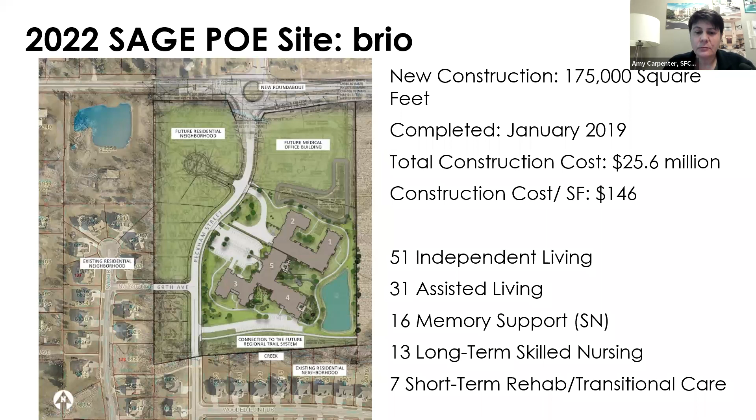So the layout of the building: we have assisted living and independent living on one side, with commons in the middle. The blue on the left is independent living, and the purple represents assisted living, and you can see how they're right up next to each other. On the right side of the plan are the skilled nursing households, which are one-story household buildings with separate entrances from the outside. The assisted living and independent living building is a 3-story building over a limited underground parking garage and service area.

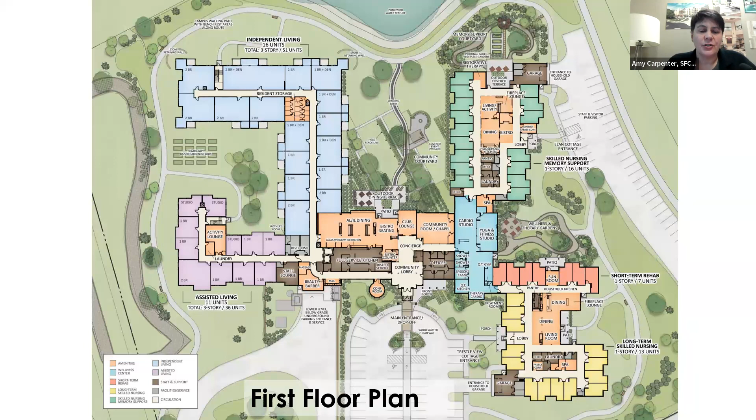Because this was a middle market targeted project, the owner and design team intentionally reduced the amount of common space and made it as flexible as possible to serve multiple functions. The bistro seating can be used for additional dining. The lobby space is used often for activities, as well as the additional bistro seating. The club lounge has large barn doors on 2 sides of the room that can open it up to other spaces, again to allow for flexible gatherings.

The one thing we heard from the residents is that they wished the community room was larger to accommodate more people. We were wondering if possibly this could have been achieved by just opening up the wall between the club lounge and the community room with another set of barn doors or some kind of movable partition. Something to be thought of next time.

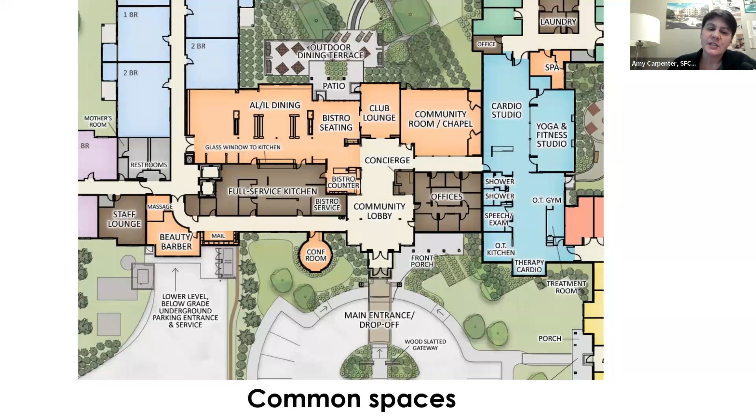The memory care household, and this is a skilled nursing level memory care, has 16 units, and the common space was really nicely divided up for sound and to create different experiences for the residents.

There is a direct access from the outside in the parking lot that comes into the household, and you can see the red arrow at the bottom of the page there. Then the garage in brown on the right-hand side was intended to be used for transfers, people being brought in, new residents, or people being transferred in and out of the hospital.

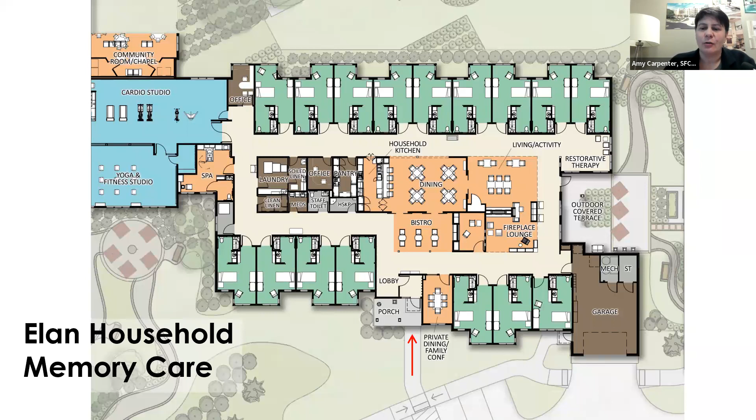One of the interesting things we heard was that the plan originally was to store garbage in the garage, but the smell got a little bit too much. So they added dumpsters outside the garage with screened enclosures.

The second household also is skilled nursing level, and this is long-term care and short-term rehab. The peach or pinky color rooms on the right-hand side of the page are designated for short-term rehab—there are 7 units there. And then the yellow rooms were 13 rooms of long-term care.

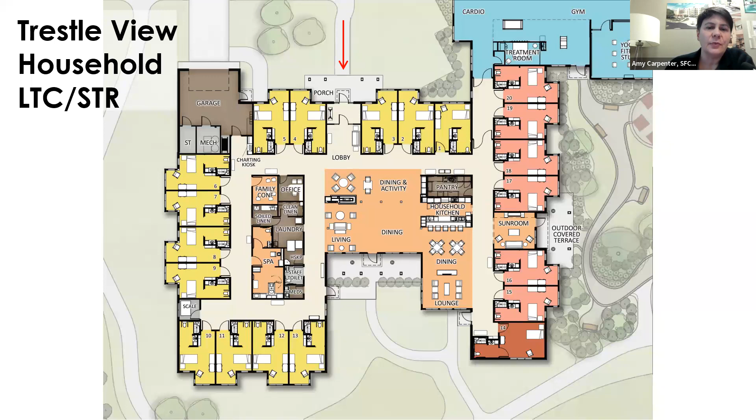The common space here is a little bit more open. It still has the distinct door to the outside, as you can see with the red arrow. And the one thing I do want to point out, if you can see on the right-hand side of the page above the peach rooms, is that there's a direct connection to the physical therapy space, which you see in the teal color. This was an intentional lining up of the short-term rehab rooms right next to the rehab space, and we'll talk a little bit more about that later.

So here's the typical floor plans for the assisted living and the independent living. Again, the assisted living is in purple and the independent living is in blue. They really wanted to put the rooms together in a way that there was really a blurring of the line and the distinction between independent living and assisted living.

One of the interesting things to note on the floor plan, if you can see the red box on the third floor plan, is that there was a 2-bedroom unit there that was originally designated as an apartment that would be reserved for college students doing an internship or working in the building. Unfortunately, there was strong enough demand that they actually had to rent out that unit.

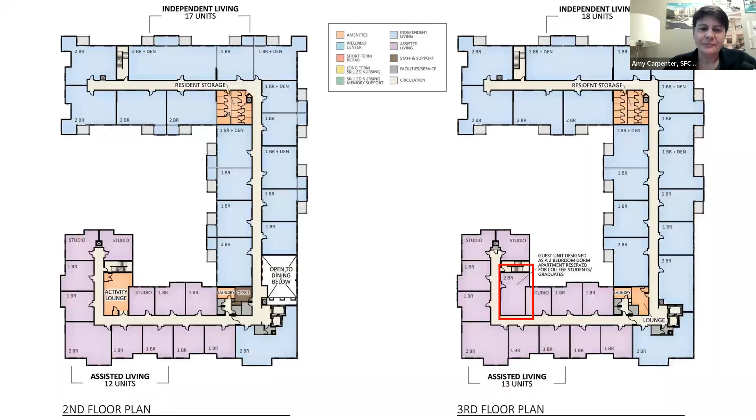So let's dive into the findings of the post-occupancy evaluation. There were 4 major themes that we discovered, and we could talk about so much more, but we're going to try to boil it down to just these themes.

We really couldn't agree as a design team whether we thought the silo was kitsch or cool. So I don't know if you guys can give us a thumbs up or a thumbs down on the webinar, but it'd be interesting to see what the group thinks—if it's kitsch or cool. We'll see.

The space inside this silo, though, was really a nice room. It had a custom table created by Amish craftsmen. And interestingly, this space was likely the only truly private space, both visually and acoustically. All the rest were varying degrees of privacy because of the orientation and layouts.

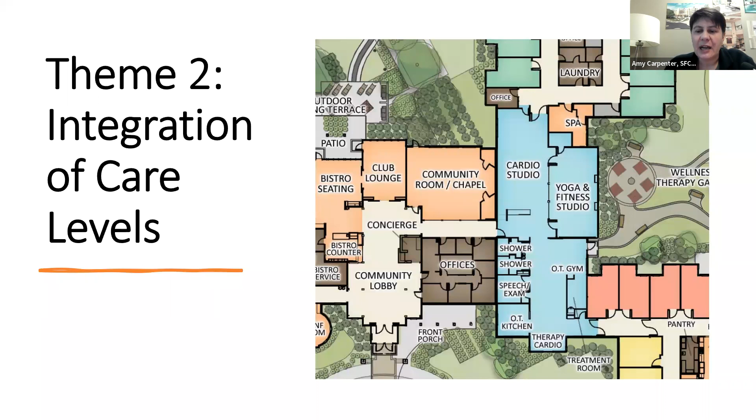The next thing we want to talk about is the integration of the care levels. And this is probably most intentional and most evident in the fitness area. The memory care household is to the top of the screen above the fitness area, and the short-term rehab and long-term care household is to the bottom right of the screen. And while you can still enter those two households from the outside directly, if you're going to connect through to any of the other spaces, or come from the independent living to visit somebody, you have to walk directly through this fitness area. Plus the physical therapy gym is on the bottom half of this area, and it shares some of the same space and equipment as the main fitness area used for independent living and assisted living residents. And then the doors to the long-term care and short-term rehab at the bottom of the page are always left open. They're not locked at all.

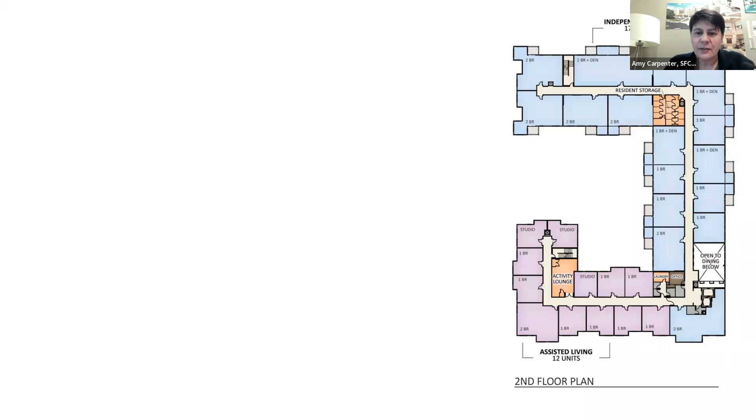The apartment building was designed specifically to co-locate the assisted living and independent living residents together. Yes, they're separated by wings. The purple is AL and the blue is IL, but they share the same elevator core, which is in the lower right. The elevator core is in the lower right corner, and the staircases are at the very ends of the corridors. There are two staircases there.

One other interesting point is that residents said that because there's no stair tower near the elevators, they wish they had a stair tower right next to the elevator so they had the easy option to take the stairs or the elevator. They said the elevators are sometimes slow because they're used for moving in and other things, and they would have gladly bypassed the elevator to take the stairs if they were able. But because the stairs are too far away, it's not worth it, so they wait for the elevator. Something to think about.

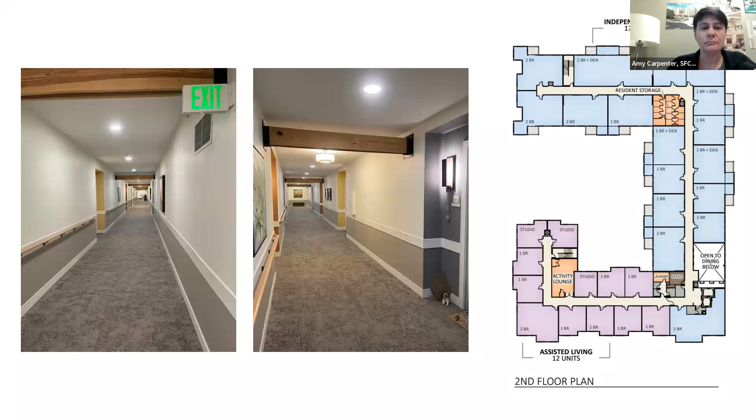Independent living and assisted living residents eat together in the dining room. There are different areas of the room with different atmospheres, but according to residents, some areas are noisier and some are quieter, and Mandy's going to tell you more about that in a minute. Folks kind of self-select where they sit based on their abilities. Assisted living residents get three meals a day, whereas independent living residents get one meal or can choose when they come. But there's no segregation by care level.

We also asked if the nursing home residents were allowed to come out and use this dining area. Residents clearly said yes, they're absolutely welcomed, and it's part of the marketing we agreed to when we came into the community, that we're all in this together and anybody is welcome anywhere in the building. In reality, though, what we heard was that few nursing home residents do come out and use this dining room, primarily because they have to be escorted and specifically brought out to be able to use it.

Teresa, the executive director of Brio, noted that they work really hard to minimize the transition between care levels as much as possible. She said there was one AL resident who had to move to skilled nursing, and she really wanted to keep her emergency call system, like the watch they use. Instead of telling her no, you have to use whatever system nursing uses, the Brio staff worked with the nurse call provider to make it work the way it needed to for those increased needs.

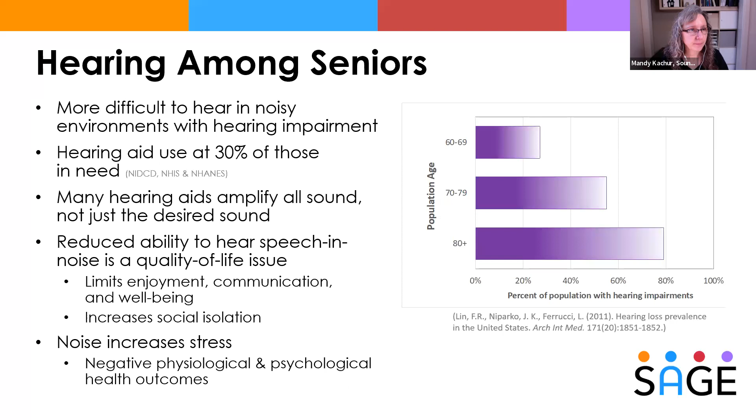The inspiration for this particular project came from another facility where SAGE had done a post-occupancy evaluation study in 2014 at Hearthstone, in Pella, Iowa. The outcome of that informed the acoustics design at the Brio of Johnston. I was able to get into the Hearthstone facility also while I was in Iowa for the POE, and we're going to compare some data to see the improvements that Brio made over Hearthstone.

My life's work is doing acoustics, making environments better for people. I'm thankful that Wesley Life and others have become more aware in recent years that acoustics is very important to people in the room. It's not just something you call up the acoustics consultant for when you've got a concert hall to design—we work on all kinds of spaces, and senior living facilities, I think, are one of the most important spaces that we work on.

Wesley Life and Pope Architects both had this importance in mind when they designed Brio and invested in incorporating acoustical materials and the like into making this environment better for the occupants. I say this compassionately, because again, this is a quality of life issue for residents, and having empathy for somebody who can't hear as well as you do, you need to keep this foremost in mind when designing facilities.

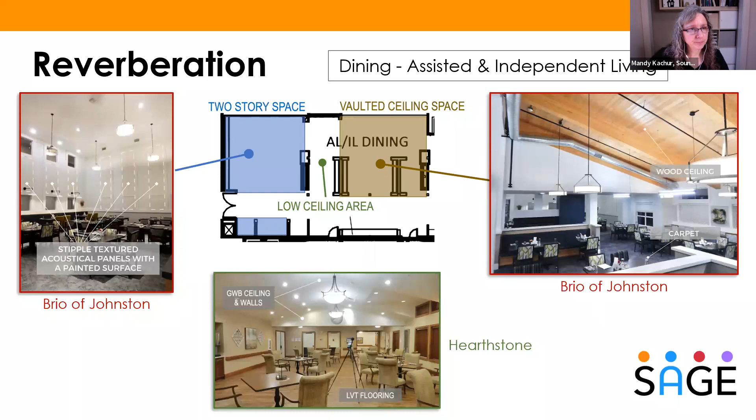And the difference you can see between the two-story space at Brio and the vaulted wood ceiling area at Brio was actually a 16% difference. Now, while none of them completely fall within the target range, the difference, that 26% reduction between the Hearthstone dining and the Brio vaulted area, was very, very noticeable. And even that 12% reduction was noticeable between Hearthstone and Brio. So there was definitely an improvement by the introduction of the acoustic materials.

The FGI guidelines for dining facilities has numbers as far as the area of the seating density, and that has to do with the number of people that you're cramming into a space, or giving enough breathing room in a space to dissipate the sound. That's typically, in these types of facilities, achieved just because of the room needed for maneuverability and getting wheelchairs to tables and walkers and the like.

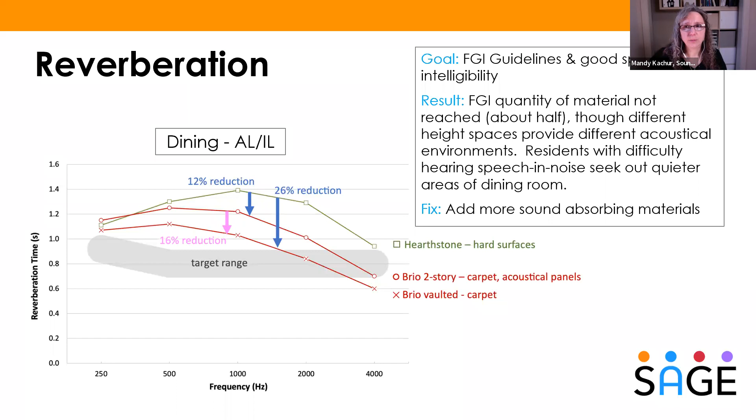the reduced reverberation time. So my thoughts are that if there's not enough budget to treat the entire space or the entire dining room, maybe make a space that's quieter, that's off to the side, that has less reverberation, more absorptive surfaces, so that the people can go there that aren't able to hear as well. And that way they're not forced to be in a larger space that's more reverberant.

We also looked a bit at the sound isolation. Now, we weren't able to look at the sound isolation between resident rooms because the sound isolation test is a lot more disruptive than the reverberation test. You have to use super loud noise and loudspeakers and all that. But after hours, when the community areas were vacated, I went back and did some testing for sound isolation.

The goal that Pope and Wesley Life had in these spaces was to acoustically connect them so that once you're shut into a room, you don't feel completely isolated. And their goal was achieved by the design. I'd like to introduce another thought, though: maybe when you can hear adjacent spaces, it might be distracting, say, to a meeting. You might not be able to concentrate as well on what's going on in the space that you're in. So this is going to be a trade-off that people need to decide on in the design phase, what exactly you're trying to accomplish.

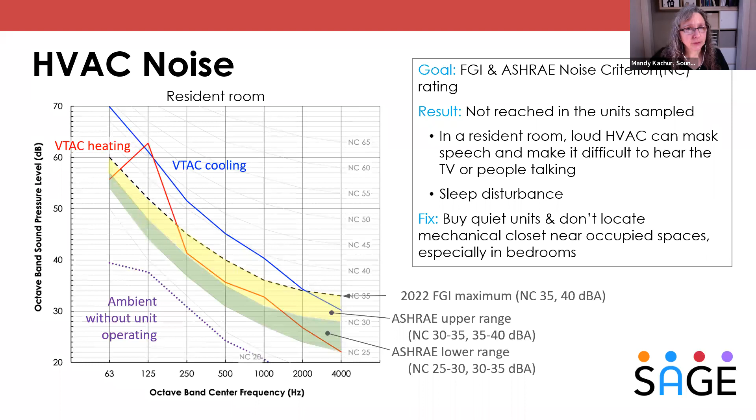The way to solve this would be, first and foremost, to buy quiet units and try not to locate them in occupied spaces. Keep them off to the side or in the back in a utility area if possible. I know that's difficult for these apartments, but especially keep them out of the bedrooms. Okay, next slide.

And in all cases, the HVAC noise in the meeting rooms were too loud. And again, if you have hearing impairments, it's especially problematic to have high background sound levels when you're trying to listen to a presenter or somebody talking.

So the fix for the more community spaces, again, is buying quieter units, but you can also do acoustical lining in the ductwork or duct silencers, lower the air velocity, and include quieter diffuser and grill selections. When you get too high air velocity across those grills, they can contribute a lot of hissy type sound.

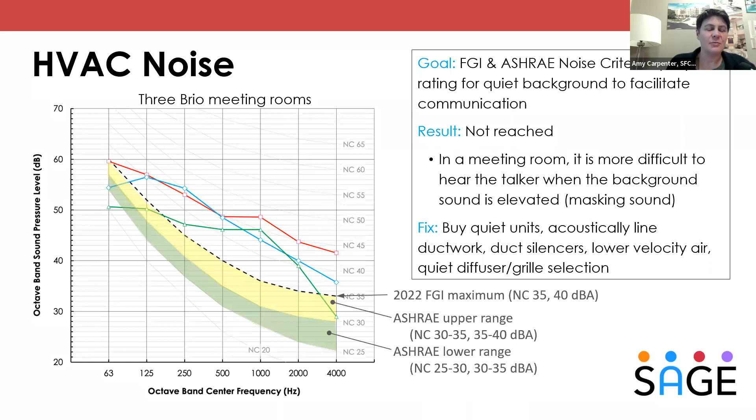All right, so the last theme we want to touch on is some of the household features specifically. Again, the memory care household was 16 units, and it really had some very nice features that we want to highlight.

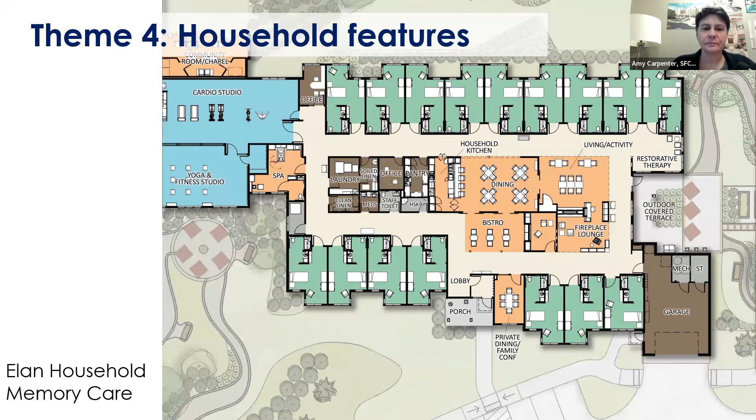The original design intent, remember they wanted everybody to go through that fitness area, which you see in the blue teal color, was really just to have one single width man door where you see the red arrow. But the design team had to work with the regulators, and the regulators mandated that they had to maintain the corridor, which means they had to have cross corridor doors, the big wide dual acting doors that you see.

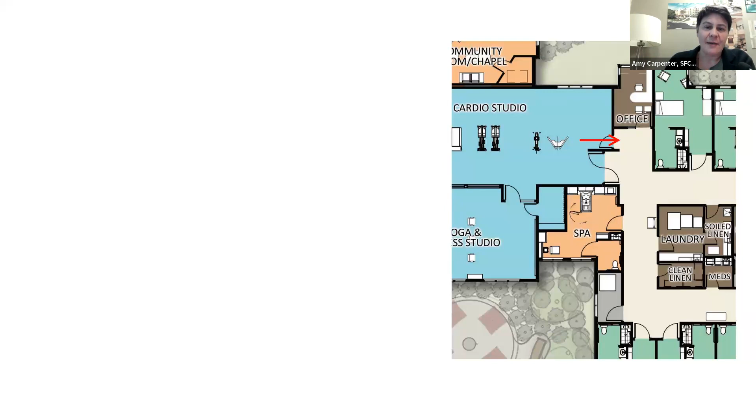So they placed those just to the south of that regular man door. On the inside, you see those doors, the single width man doors on the right in white, and then the cross corridor doors. They did a really good job of disguising those doors with the mural applied to the door. The lighting is lower, so it distracts from the door, and the oil rubbed bronze for the push bar, the panic bar, really helps it disappear into the mural.

As a result, Teresa, the executive director, said that they really don't have a big problem with exit-seeking behavior. I think part of it is because there's so many other interesting things to look at and to do.

One really interesting aside: if you see in the plan on the right-hand side, there's a little wall to the north of the red arrow for the office. On that wall is where the community has all their required postings, nicely done with nice frames and everything. But they can't figure out why there's a picture of the ombudsman posted on that wall, and that picture routinely disappears, and they don't know why.

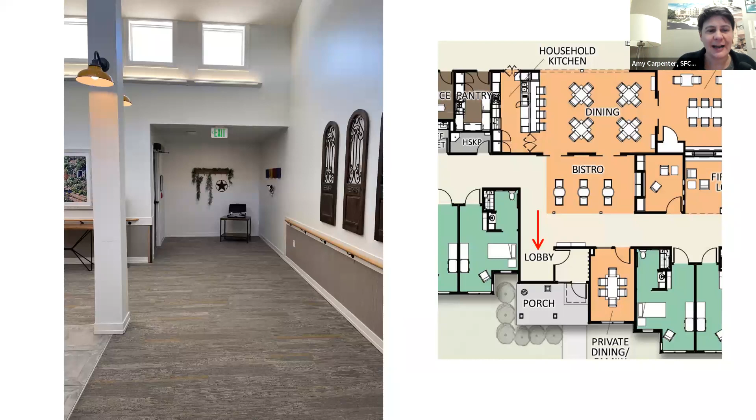But at least the picture of the ombudsman is distracting from the use of that door. The main door that leads to the outside is also cleverly disguised. In the plan on the right-hand side, it's kind of tucked around the corner. The ceiling level is brought down, the lighting level is lower, and all of that discourages residents from going into that little nook. And if they do go in that nook, there's an old-fashioned typewriter there and some interesting things hanging on the walls that will distract them and give them an activity to do, distracting from the door itself.

Now, the door itself is also treated with a mural that disguises the door and the hardware. This was so successful that during the initial open house, when they had the board members walk through, the board couldn't figure out how to get out of the building. They said, 'You've done a really good job here.'

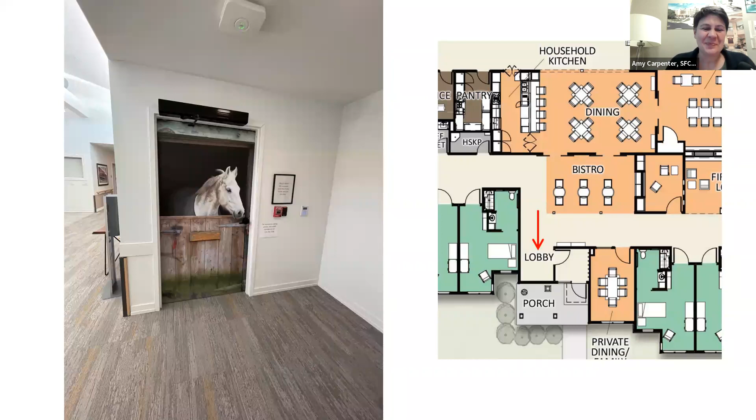The owner and the design team also wanted the weighing process to be a better experience and not an afterthought. Getting a resident's weight is one of the first things you do when they're checking in or coming to the community for the first time, and it's always a stressful time. A lot of times the scale is buried in a tub room somewhere or just randomly placed elsewhere in the building. This group, the design team and the owner, really wanted to make it a special experience.

So they created a special room, highlighted in the red box, and built the scale into the floor so that you're just walking across the floor, it's not as obvious. The room felt nice, with a nice window to the outside to bring in natural light, and a glass door leading to the corridor.

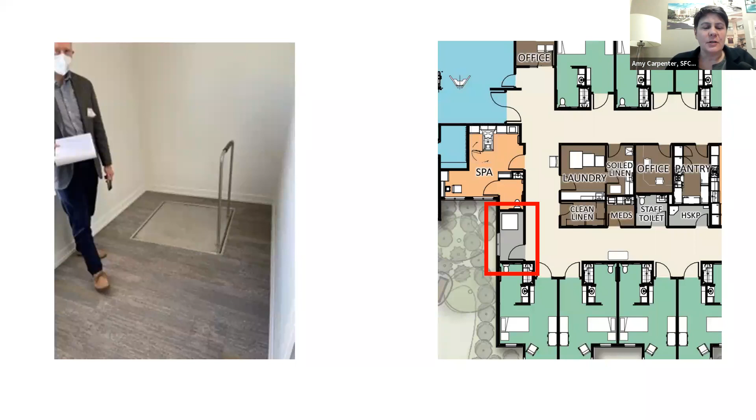One of the problems they discovered is that because the glass door was on axis with the main corridor, you can see it in the plan on the right-hand side, it was directly in view. The window beyond was also directly in view of that glass door. The residents thought that was the access to get outside, maybe leading to a porch, and they were getting agitated trying to get out that door. I'm not sure exactly who came up with the solution, but they applied a simple film to the glass door. It was enough that you still get light coming through, still a nice experience, but because you didn't have that clear sight, it greatly reduced the number of residents trying to go out through that door. So simple solutions sometimes really work.